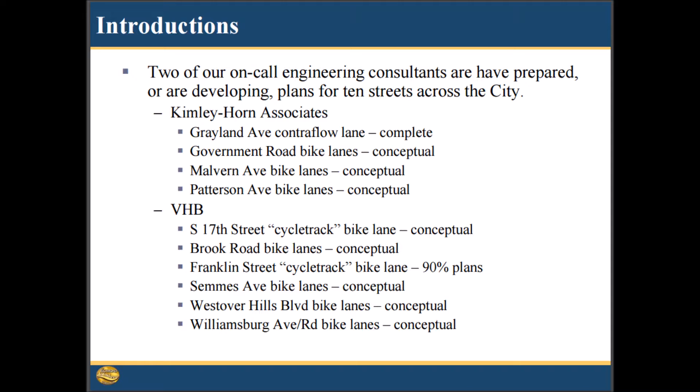Also in the back, at the table next to Bike Walk RVA, Andy Clark is here. Andy, some of you may know from his many years as executive director of the League of American Bicyclists. He's now with Toole Design Group. Concurrent to what we're doing, Toole Design, working on behalf of Federal Highway Administration, is providing technical assistance to the city to look at the bus rapid transit corridor, focusing on better bike and pedestrian access to the BRT line through nodes where we're going to focus transit-oriented development. Since that's happening at the same time, we thought this was a good opportunity to have Andy here to answer questions and help get the big picture on how some of these projects will be aligning.

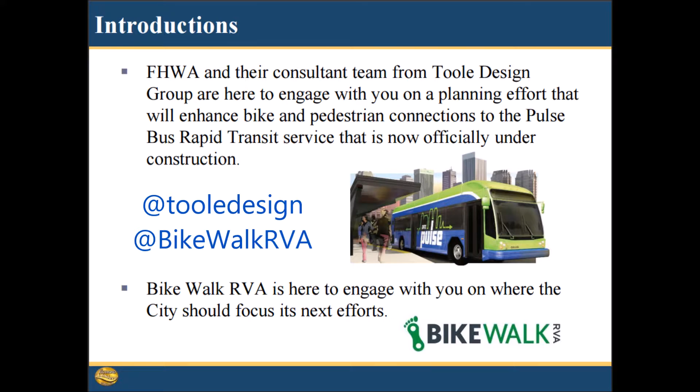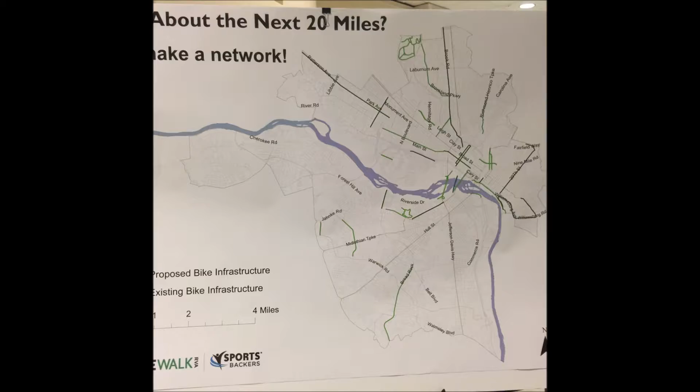And then last but not least, Bike Walk RVA, Max and his crew in the back. A lot of you have already filtered past his table. They're here to talk to you about some of their engagement efforts, and also once we start putting these 25 miles on the ground, what do we then start moving forward towards filling in the gaps, making those connections, and continuing to build out networks of bike infrastructure. So we wanted to bring a lot of people to the table and really get some good dialogue going.

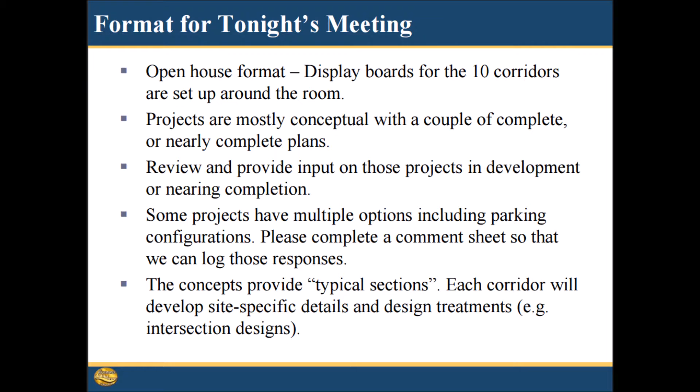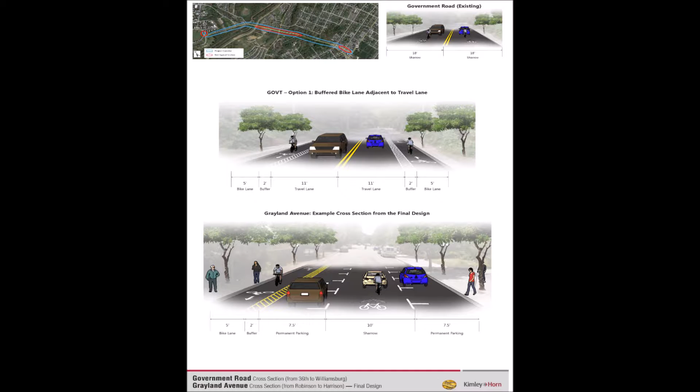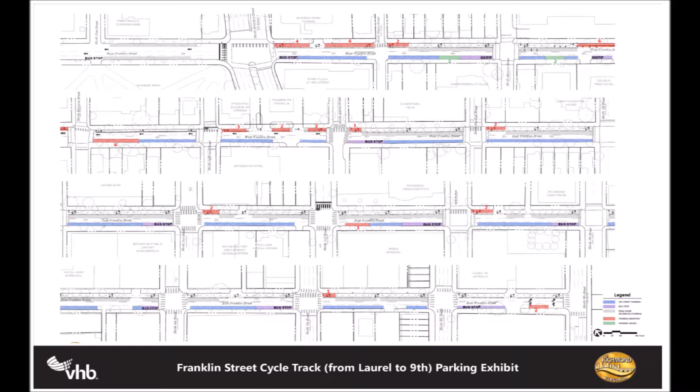A lot of you have kind of already been circulating, so it's pretty much an open house format. There are some conceptual boards—some have options, some don't, depending on the conditions. There are a couple of projects, one of which is complete, Grayland Avenue—it's a contraflow bike lane on the one-way section over in the Randolph community, just to show what that will be looking like. John Cardy over here on this wall has the 90% plans for the Franklin Street cycle track project that we kicked off back in the spring. That's nearing completion, but there are still some opportunities for discussion on some of those design details as we move towards completion.

And then also the options where there are different alternatives—we certainly want to get your feedback. So the comment sheets that we have allow you to note some of your preferred options, comments on the back. If you do so, please note the specific project and option you're referring to, so we can aggregate those and have them well organized and know exactly what we're getting back from you in terms of your responses. What you'll also see on the boards is some red circles.

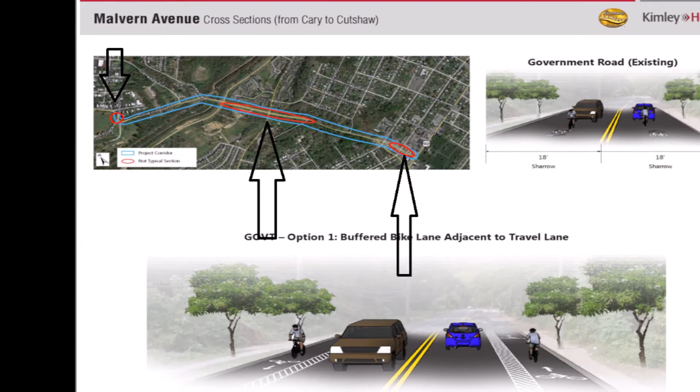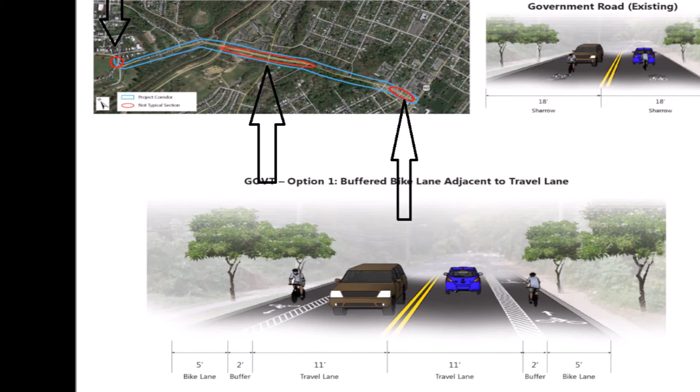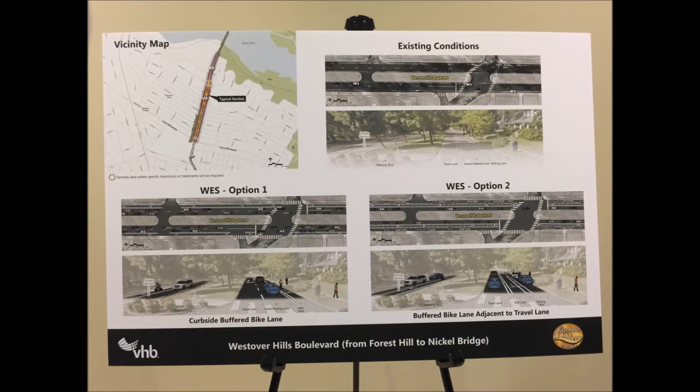Those basically denote where there's a different condition. Because these are conceptual, we're not getting down into the on-the-ground details—we're looking primarily at what's called a typical section. So those will be areas that get fleshed out in the design process later on. Just a couple quick examples: where we have different options, talk to the folks at those tables, talk through the things that you like, don't like, what you would prefer. And again, we'll start aggregating the feedback that we get.

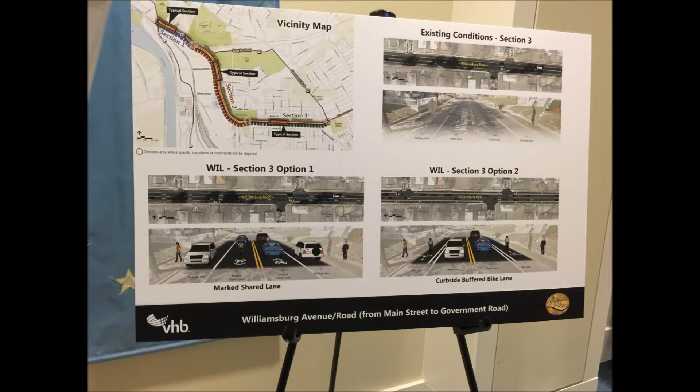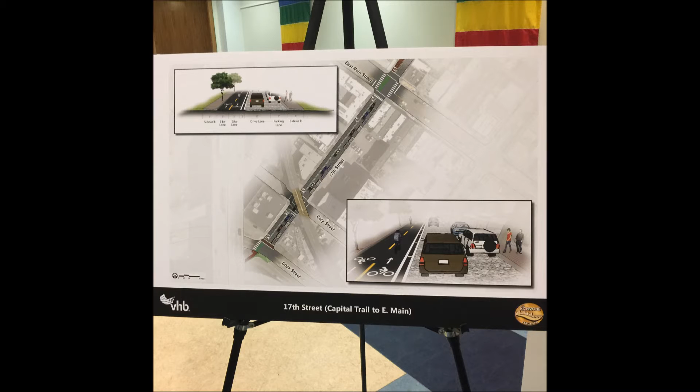This is another example there from the VHB team, just to orient you to some of the different conditions. In particular, we want to look at some of the conditions that relate to the project, say what we do with parking—whether we're eliminating parking, whether we're shifting parking off the curb, serving as a kind of barrier separation for the bike lanes. So provide us with those comments, especially if you live in any of those communities, what you observe the impacts might be with any different conditions. And again, on the sheet, if you have a specific comment on the back, make sure you let us know which project and which option or alternative you're referring to.

We're also going to have this online—it will be up either tonight or by close of business tomorrow. So the presentation, the comment form, and the display boards will all be available. If you have friends who might be interested in this, let them know, tweet it out, share on social media, let folks know if they weren't able to attend tonight. We'll have that up for 2 or 3 weeks to allow people to provide feedback who weren't able to attend tonight.